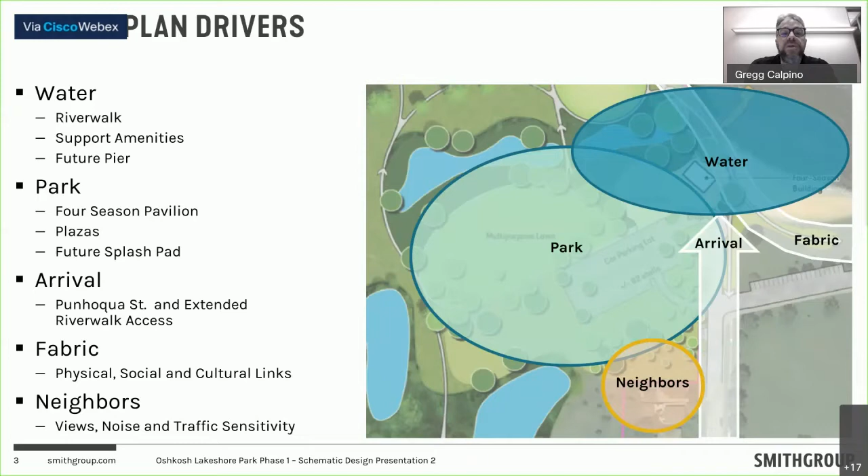So what does that actually mean for our site? From a water perspective, it's water plural—there's the junction of the lake and the river, how that's experienced, as well as the lagoon adjacent to us. These are all factors as we locate and design the building, thinking about views, what presence it will have on the Riverwalk, the experience from the building, and what to do with lagoons and pump houses that are nearby and not going anywhere.

From the park itself, there are long open views and fairways we can use to our advantage, while also making sure they remain great views in their own right—thinking about what role the building plays as well as having the right presence in the park.

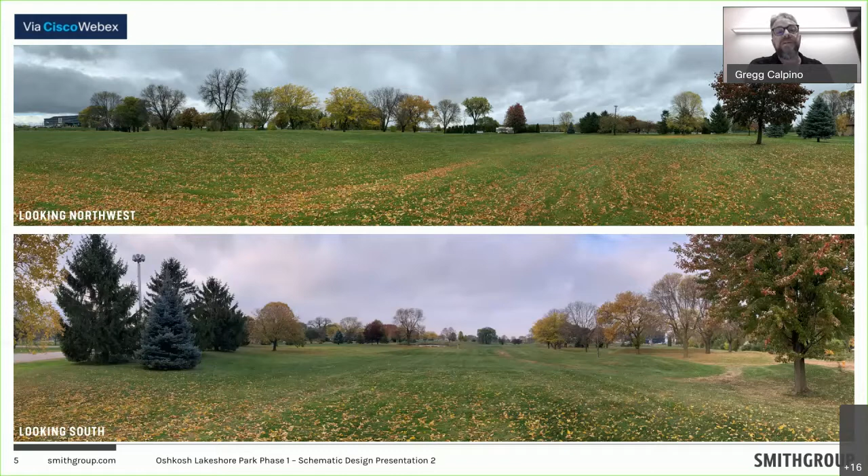Thinking about the arrival, there's a bit of drama as you come up Punhoqua—what's this new view going to be, how does this street end? It's evolved with the Riverwalk and some of the road that's been removed for it. How does it tie the two parks together? What's going to replace this building here? These are all things we're thinking about for the arrival experience.

Also thinking about being a good neighbor, both immediately to our south, but also, as someone brought up, the Oshkosh Corporation as a new neighbor—what does that mean in terms of their employees, but also the aesthetics, and how do we play off that from a design perspective. These are all factors we're looking at.

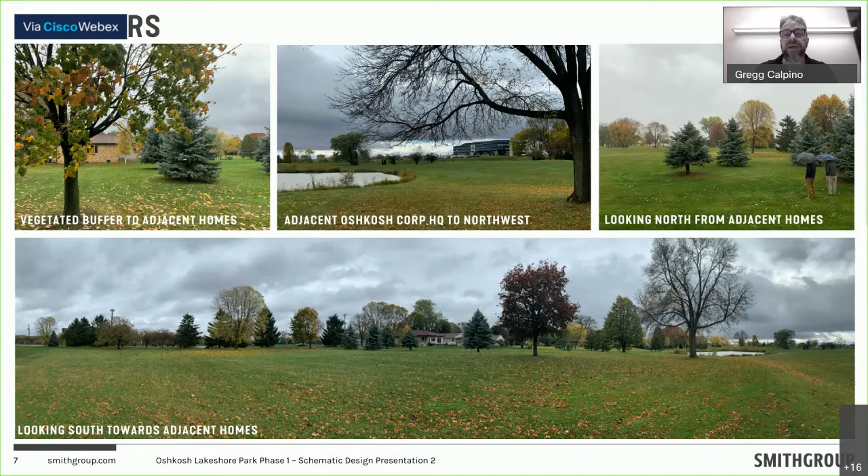One of the things we're looking at in our site analysis is the 100-year flood level, because of the proximity of the new four-season building to the water.

We've learned through a number of different materials shared with us that currently where the existing maintenance building is on the site, this will be the location where the new four-season building is sited. The current elevation of that building, that slab on grade, is actually 1 foot below the 100-year floodplain.

So one of the things we know we want to do is raise the new building up to a safe elevation. Right now we're looking at elevating it about 5 feet above the existing 100-year flood level. As part of the site analysis, we're also looking at subsurface conditions, where we have stable soil and where we have unstable soil, and what that means for the building's design in terms of the structure it's designed upon. This helps inform the building design in general.

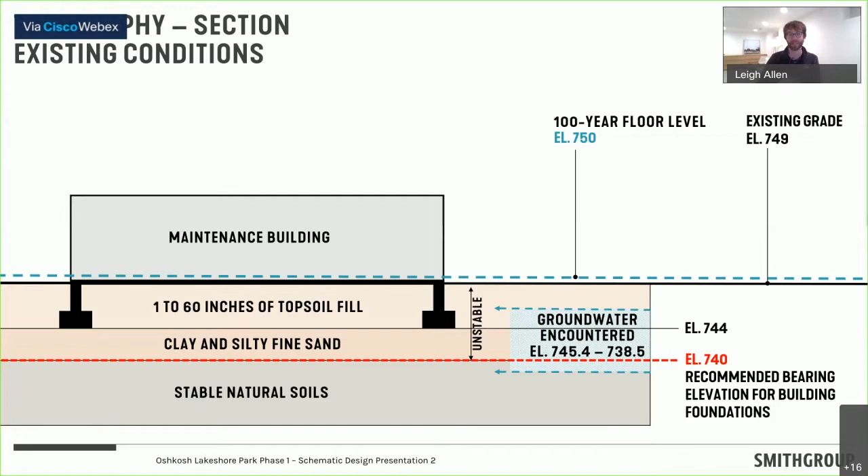So really turning that analysis into some of the design drivers. This is kind of turning the corner into what they become as guiding principles. These are really the things we use to define the design, but also evaluate whether we're achieving it. So again, those analyses of things I brought up—water becomes embrace the water.

And that's the lake, the river, the lagoon, as well as stormwater—again being a good neighbor from an ecology perspective. Serving the park, that's physically the blue arrows, that relationship with the water. Serving the park, thinking of the other side of this building, kind of the yin yang of the blue and the green, its role serving both parks. And again, thinking about that balance between the casual visitor and the program visitor that the four-seasons building will provide.

Thinking about celebrating that arrival experience—that's both Punhoqua and the Riverwalk, the future pier in the master plan—thinking about how you walk here, drive here, bike here, and making that a great experience for the user, as well as the statement that the building and the park make from that perspective.

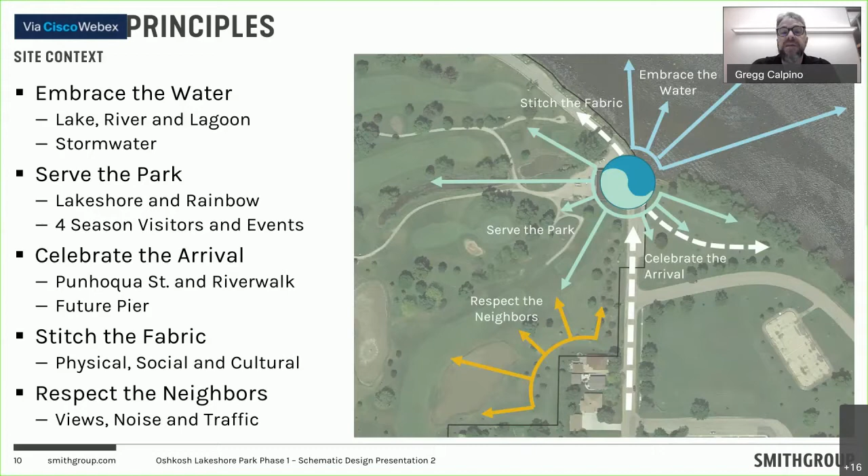Thinking of it in a way that really does stitch things together, both in terms of what's been built and what will be built in the future. And then being a good neighbor to our folks to the south as well, respecting views, noise, and traffic, things we've been trying to do through the validation but continue to do with our design refinements.

And then that really led to the next step into actually getting into design, and where we locate buildings and plazas. These were kind of three big drivers that we took from those five. So celebrating arrival talks about how this building interacts with Punhoqua in terms of its presence, as well as things like plazas—how do you get there?

What do you do? Do you wait for a ride? How do you get to the building from the road? Things like that. Engaging the water has a similar response in terms of views, things like a deck. And what's the indoor-outdoor experience there, as well as serving the park.

So really you start to get into the idea that there's a building with different plazas, views, and decks—things like that all start to have a little bit different role, different character, different program, but they all need to be stitched together as one design, which has really become our mission here.

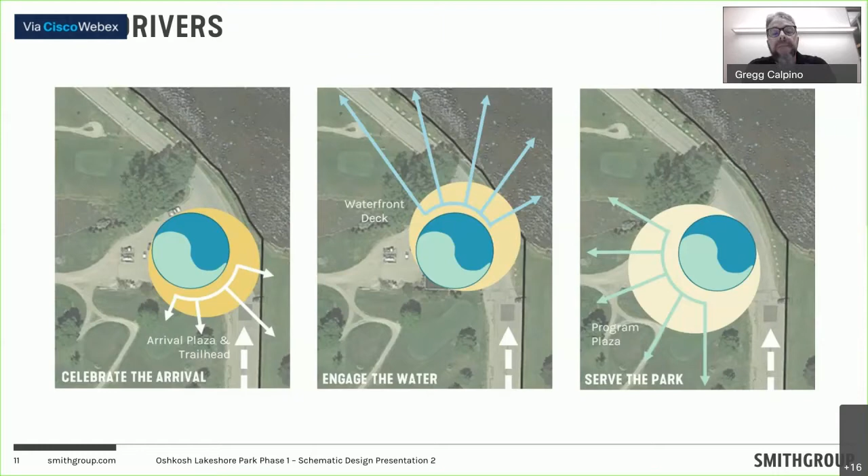So doing all of that, we had looked through a series of different alternatives of what the building could look like, the site, how that could all work. We settled on this general idea, which is, again, one step further from the last time we saw you.

The idea of a drop-off at the end of Punhoqua, with the parking lot roughly in the fairway alignment, with an egress or exit that would leave the parking lot, and then the idea of a building that was a very compact, simple floor plate with generous outdoor space around it, so the building could flow out, ebb and flow with the size of events or just everyday use. So the idea of decks and plazas around it as well. Also thinking about future things like the spray ground as well as the pier and how it interfaces with the Riverwalk. So this was the general arrangement of the site that we settled on to start getting into more detail.

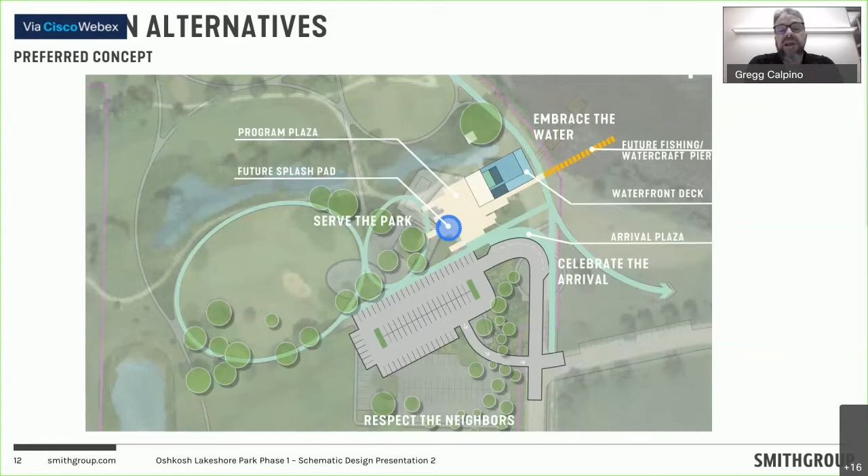Now, this is very conceptual, but a few different concepts were presented for a building parti that combined the main program elements of the Four Seasons building. There will be an open air deck that will wrap a portion of the building. There'll be an assembly room, building support space, which would include indoor access restrooms, a warming kitchen, mechanical room, and storage room.

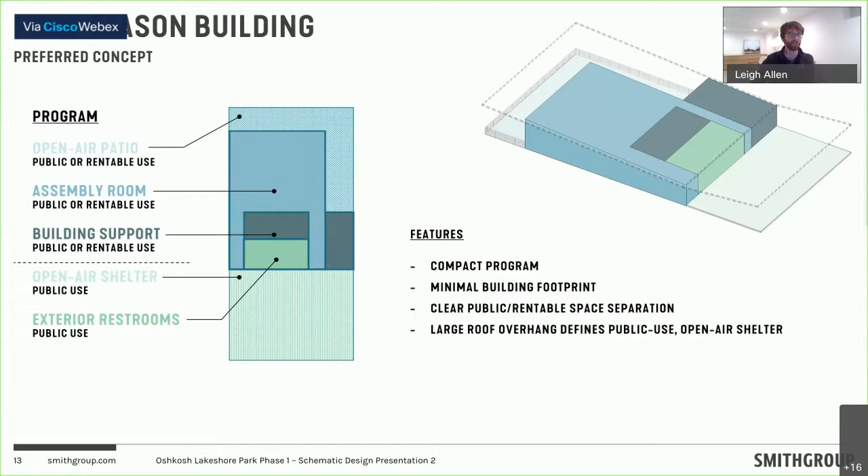As Gregg said, this is one of the few concepts that were presented previously. The preferred concept showed more of a compact program. It's really identified as an open use space, this kind of outdoor terrace area, sandwiched between a shared core, which again is these support spaces and the exterior access restrooms, the assembly room, and then the deck.

So in general, keep this concept in mind as we move forward: open use, public access outdoor space, shared core, and then what would be the rentable portion of the building, which would face towards the water, which you'll see in a few slides coming up.

Think of that rentable blob as sort of an overlay. The entire thing is really an open use facility, but the enclosed rentable piece is where you might have that additional ability to rent it. I'd say it's an overlay on an overall open use facility.

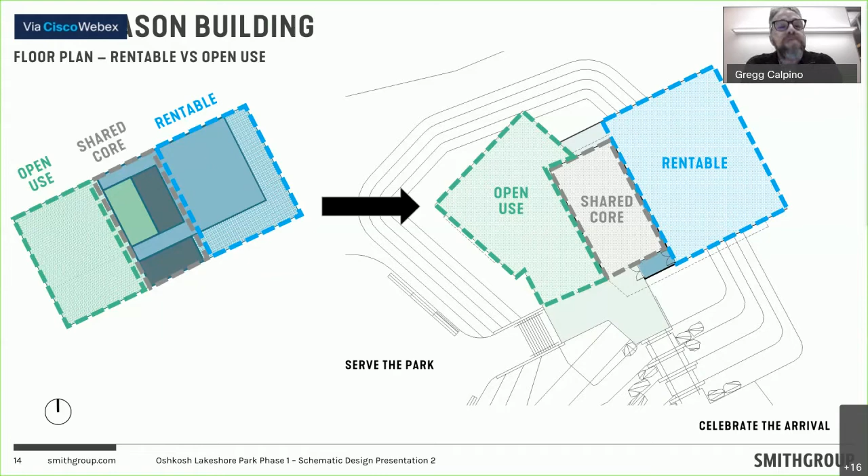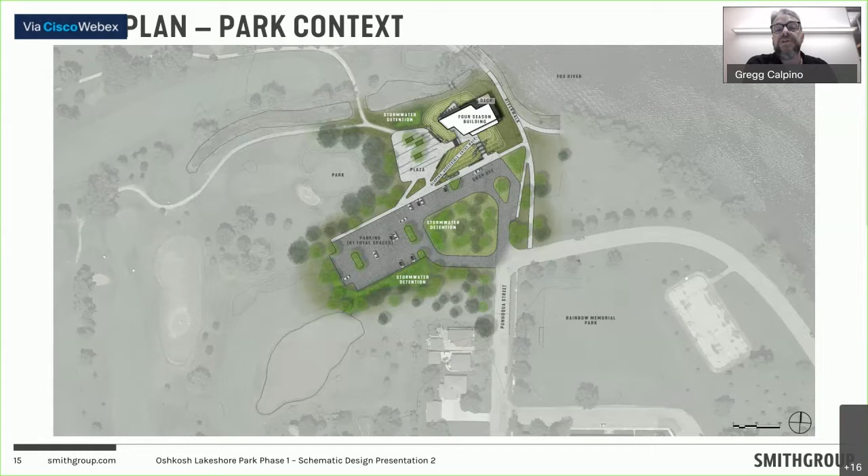Thinking about accessibility, thinking about different ways to get to the building, and thinking about additional pieces like the spray ground down the way. So maybe getting into more detail.

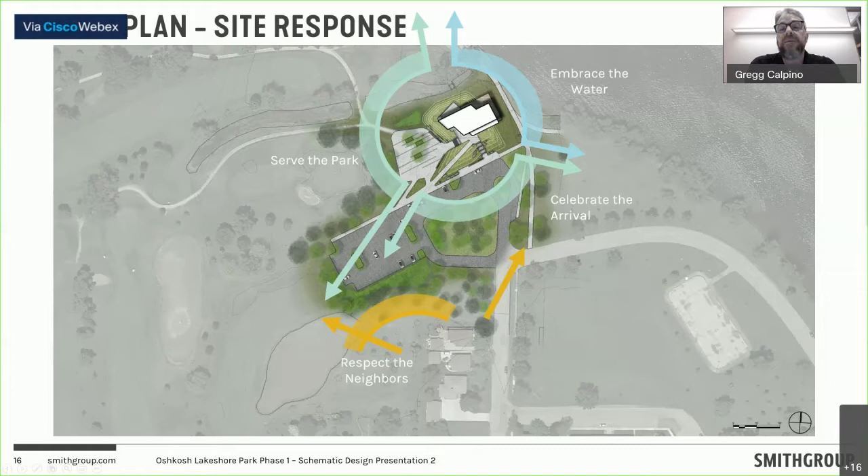The next slide goes back to those guiding principles, making sure we're always holding ourselves accountable to these: embracing the water, serving the park, celebrating that arrival, and being a good, respectful neighbor here.

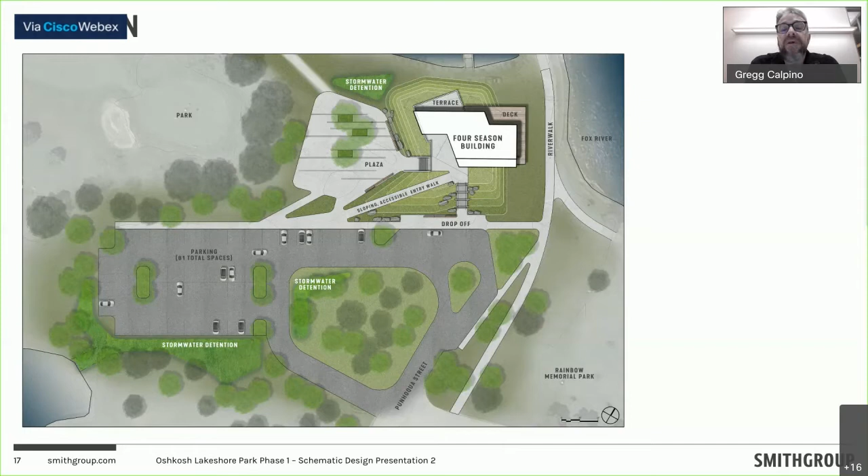Getting into a little greater level of detail, I'm going to go quickly through this to show you how it works. This is the overall site plan around the building. So driving up Punhoqua, there's a drop off that serves a couple of purposes, which I'll hit in the next slide. It is a true drop off, but it also provides some parking as well.

Thinking about fishermen who don't go into the building, they fish along here. So thinking about those uses, the drop off could double as providing a few more parking spaces for that, as well as for just wanting to drop off at either Lakeshore or Rainbow Park.

Generally, you start to see the flow of how cars would move through this lot, as well as generally where the parking spaces would be. There's a nice relationship of drop off to building, nice relationship of where some of the ADA spaces would be to the building, and ramps that get up to the door. Again, very clean, efficient parking.

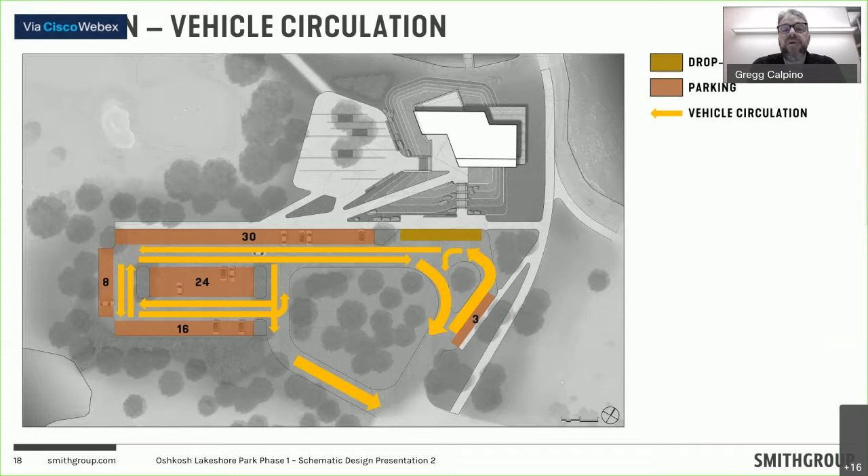And then you'll see in the next slide, this works very well also from a service perspective. This illustrates how fire trucks, ambulances, as well as things like trash pickup would also use the flow here. We did some early modeling of fire trucks, and this larger drop off or aisle that serves the parking lot works very well for fire access and turning those larger vehicles around, whereas for a typical regular vehicle, car, or SUV, the smaller drop off on Punhoqua would work just fine.

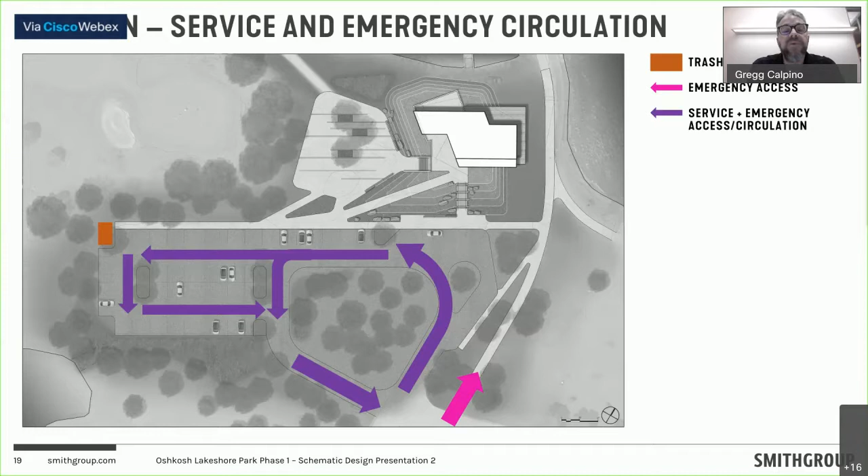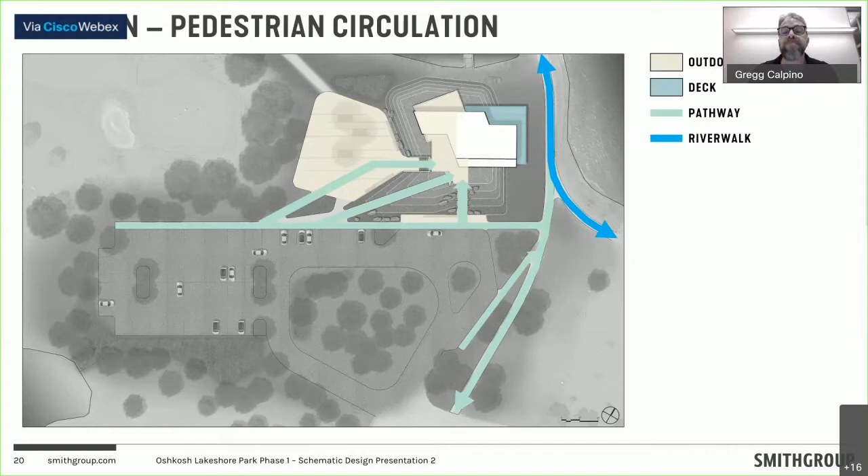Thinking about materials, we're still early in the process, but generally this is a park, and I think the master plan was very supportive of a more rustic, nature-inspired park. So the idea of using natural materials like stone blocks can be used for both hillside retaining and also for seating and other features. We want a lot of different ways to get in from an accessibility perspective, but we also might have some direct routes with stairs knit into the landscape.

Thinking about the decks and plazas being very flexible outdoor rooms that complement the building with open views. Leigh will get into the railings and things like that later, but again, it's a nice blend of natural and open waterfront materials that really celebrates the connectedness to nature.

Thinking about the plantings, we're considering the overall park and how this site will be the first piece of it, taking our cues from what would happen here naturally. Some of it already does. We're thinking about natural communities like oak savannas and prairies, both wet and dry. Some of the wetter areas are inspired from around the state as well as this area. We're starting to think about how these would overlay on the site, then come up with specific plant mixes representative of our planting design. Those details will show up in schematic design, and we'll get into much more detail in design development around species and size. But generally we're trying to take our cues from nature and give back a little, as this golf course transitions into a larger, more natural park.

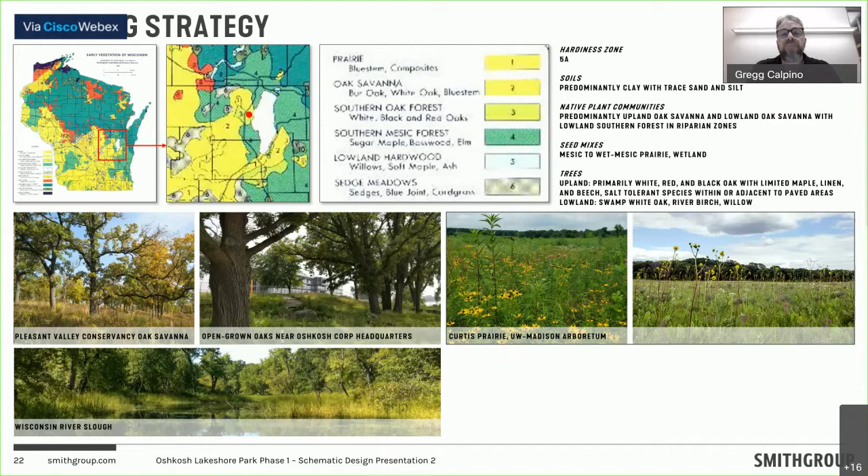This is an indication of how that would look on our site. Very little lawn — we're thinking of lawn as the transition into Rainbow Park and maybe along the trail. The majority would be more of a native seed mix, varying by how wet the area is, but generally a much more native seed landscape.

Where water is intentionally going, we're thinking of a bioswale mix that will take that water and have a bit of a different character — think of it like a wetter version of the prairie, with a slightly different species mix. Then where we want a more refined approach, that would be contained to areas around the ramps and the building, where there's higher foot traffic or more visibility, but it would still be representative of the broader native landscape across the site.

Speaking of drainage, we're starting to think conceptually about utilities and drainage — generally where we'll tie into feeds off the street for gas, water, and power. Leigh mentioned elevating the building 5 feet, so this starts to show where that footprint of the grading might be. With that comes the ability to get to the building at a very approachable slope, less than 5% to meet ADA, without railings, feeling like a natural approach while also celebrating a bit of the drama coming up to the building, thinking about where water is going to go.

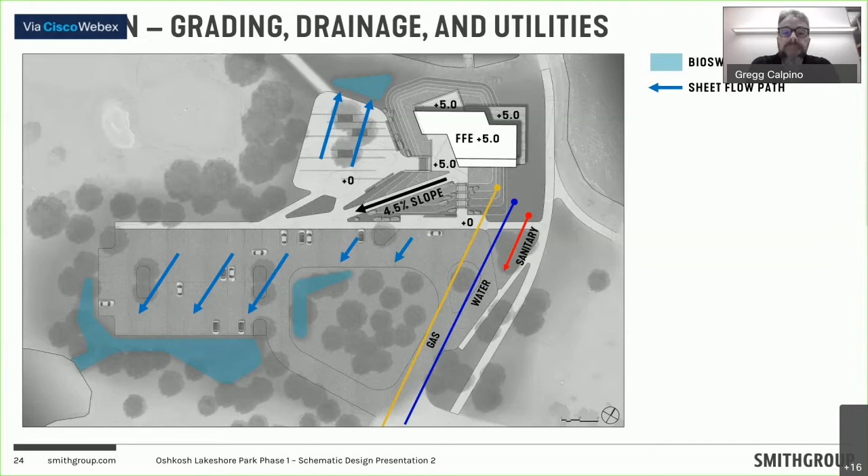And then when you put it all together, this is kind of what the site plan looks like. A little more detail, just zooming in on the building. You start to see where you might have some stairs, ramps, what's paved, what's natural. Leigh will get into more around the building, but we're illustrating where you would see pavement on grade, labeled terrace and plaza, and where you would have an elevated deck, labeled deck. Think about these as spill-out rooms from the building itself.

One thing we're starting to think about that's not in this phase, and there's still more detail needed, is we're working with Ray and his team in terms of what the spray ground will be down the line, what size it is, how it's going to work. That has implications for where service goes. But generally, we're thinking a quadrant of this plaza would be dedicated to that spray ground.

We are designing this - some of this effort is also part of our cost estimation scope. We're going to look at what all this costs, but right now we're thinking the plaza is likely going to be a future phase. We want to make sure we design it now - how big it's going to be, grade it, make sure we know what paths are going to connect to it - so it's an easy piece to plug in when funding is there for the spray ground. But if funding is there to build part of the plaza, we'll try to get as much as we can in at this point. So that's part of our effort here - there may be some pieces you see in schematic that may become future phases the next time we're in front of you. The plaza would be one of those.

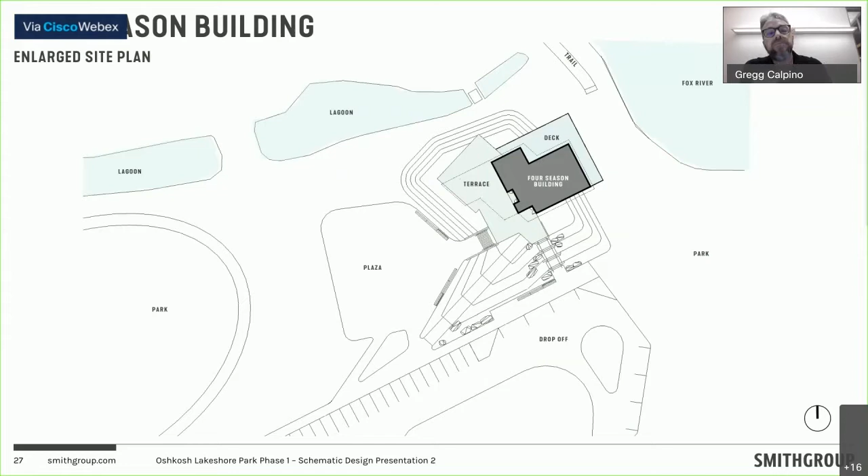All right, so zooming back out a little bit again, just to put everything back in context, you can see.

Hey, Leigh, can you maybe get a little closer to your mic? You seem a little quieter. Thanks, sure, sorry - is that better?

All right, so zooming out a little bit and showing again the context of the site and the site's relationship to the building, what we start to do is identify the primary gathering areas of the building - this outdoor terrace, the outdoor deck, and the indoor assembly room being those three primary gathering areas. We'll keep revisiting these areas throughout the remainder of the presentation.

Once we understand where those gathering areas are, we start to think about the views achieved from each one of those spaces. One of the things we think is important is to create this idea of an equal, democratic space. So if you remember the diagrams I shared before, where this blue area of the floor plan is that rentable space - the terrace was that open use space, and then you had your shared core area.

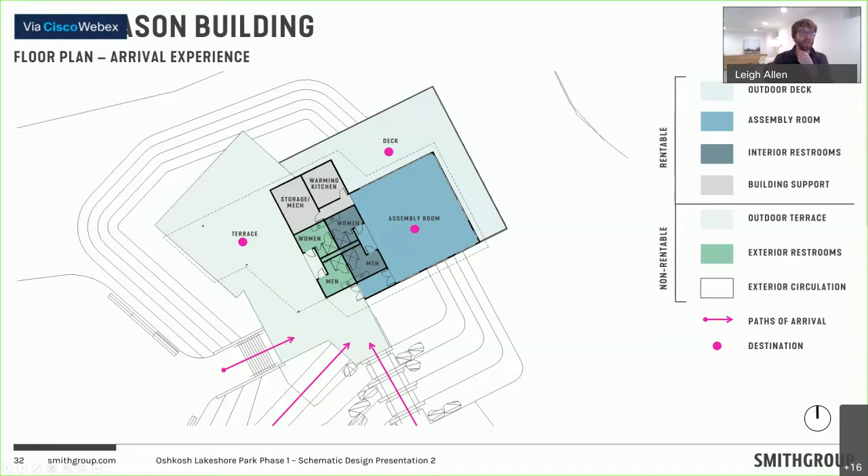So that's one factor of the wraparound deck, there's a bit of mystery that rewards you for that discovery, but there's also something very obvious about the decision point at the door. That's one of the big pros and cons there.

So what we're going to do in the next couple of slides is try to put you in each of these destination spaces. We've started to pull images of spaces that we feel this space could have a similar feel to, where you would look down upon the plaza, look north to the park, look north to the water. One consideration for this terrace design is potentially incorporating an outdoor fireplace that could be used in the cooler months, and perhaps there's an opportunity to put one here, and likewise on the other side, on the rentable portion of the program, perhaps there's an opportunity to place something in this corner here.

I'm sorry, when you say here, I don't know, I can't see what you're pointing at. Can you guys see my mouse? No, not really, or it's really fast. I'm sorry, it's not clear to me, maybe it's just me.

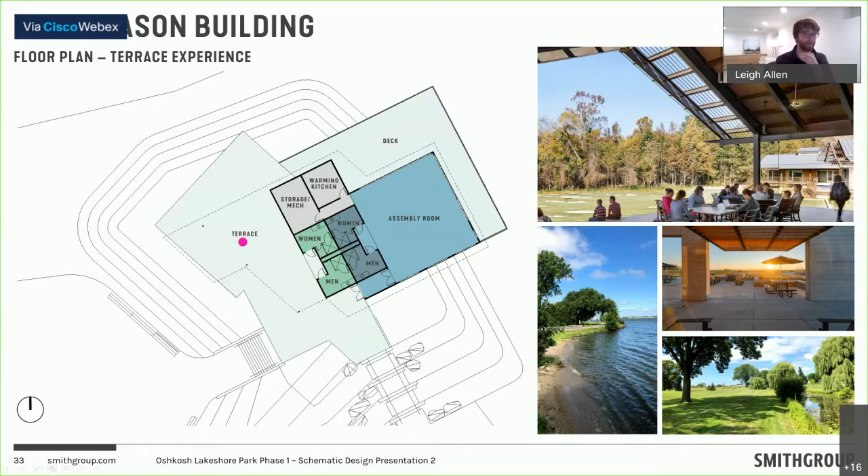Some of the primary views afforded from this assembly room include direct views of the water, and you're also going to have direct views of the park.

Then we're starting to look at ways of exploring flexibility of use between the assembly room and the deck attached to it, potentially looking at operable partitions, large glass openings that could be folded and fully open, so it starts to blur the line between what is inside and what's outside. That gives you an opportunity to flex between both indoor and outdoor spaces.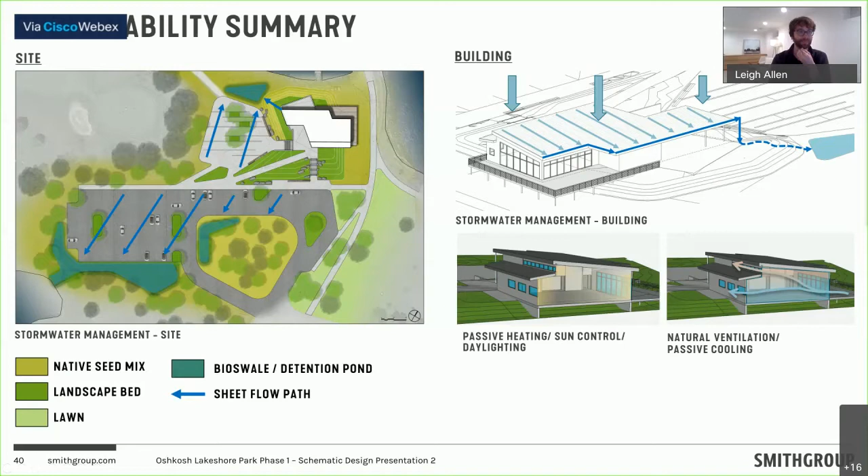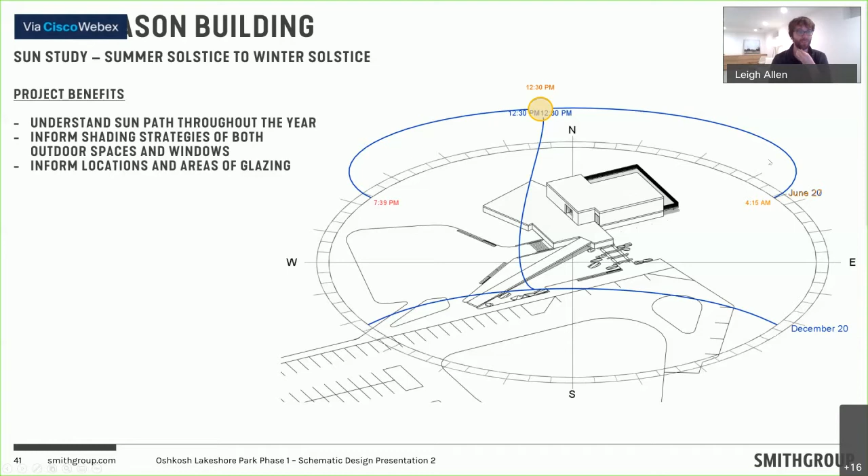The last couple of images were purposefully diagrammatic, design drivers helping to inform the project. Now we're coming back to our project site. For the next couple of slides, we're doing a sun study, just looking at a flat roof for the purposes of this study. It's really looking at the sun's path throughout the year, from summer solstice to winter solstice, factoring in the two equinoxes at the midpoints of these two paths. What we learn from this is where shade and shadow fall, which facades are in direct sun all year round, and how that informs shading strategies for outdoor spaces like the terrace and for windows along the facade.

That has the orange line on it. You start to see that during the winter solstice, the deck to the north of the building is in complete shade. During the equinoxes, it's in partial sun, and in the summer solstice, it's in almost complete direct sun—again, considering a flat roof for the purposes of this study.

You also start to see that the terrace is in direct sun, full sun, all year round. So what that starts to tell us is really you want to start considering perhaps some kind of shading option, potentially a roof overhang for that terrace, to give people who want to hang out there a little bit of reprieve from the direct sun during the summer months.

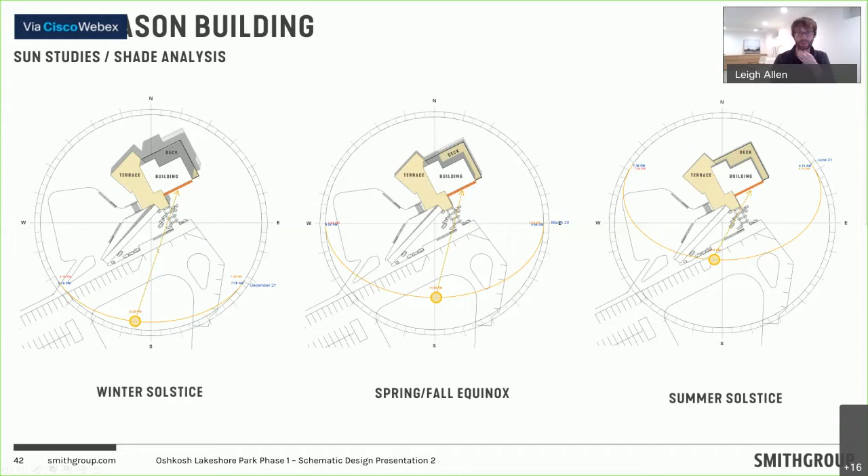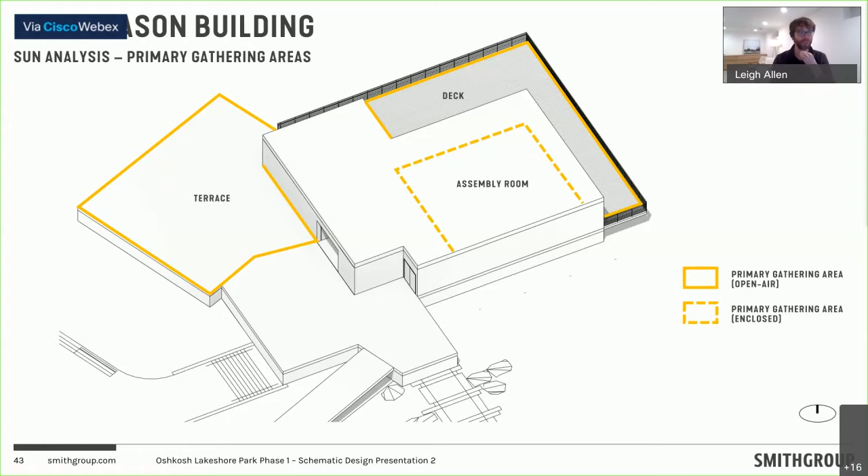Looking at the spaces that are either in partial sun or indirect sun, we would consider shading the deck optional, to be honest. Depending on when you're on that space, you may be in sun or in shade. In spring and fall, half of the deck would be in shade, half in sun, so you can easily flow between. You have an easy decision without having to add anything else in terms of a roof overhang, gazebo, or some kind of sun shading device.

And for the facades shown in blue here that are in indirect sun, we would say that adding shading devices or designing the roof overhangs to provide shade in the summer would be optional as well.

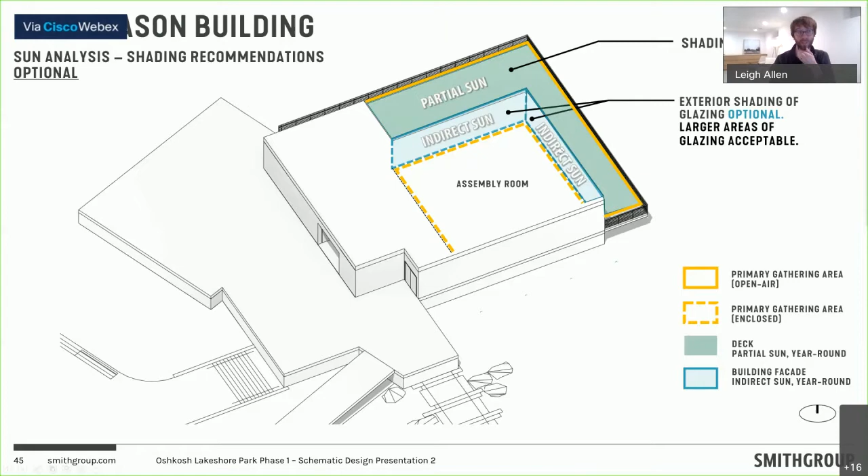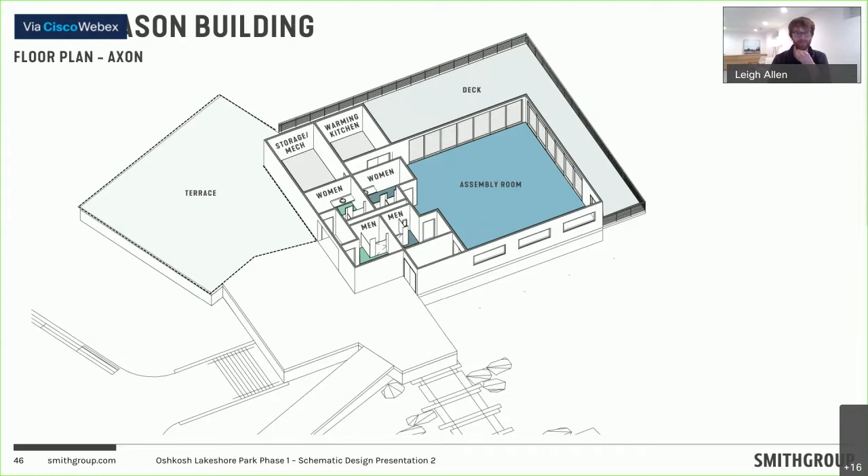This is just one concept, taking everything I just mentioned in terms of passive design strategies, as well as the sun paths, into account, and how all of that together informs what this building wants to be - where we have glazing, what size that glazing is, is it directly off the assembly room, do we have clerestory windows, where are roof overhangs, where are our outdoor sheltered spaces - looking at these outdoor sheltered spaces as the outdoor room, as Greg had mentioned before.

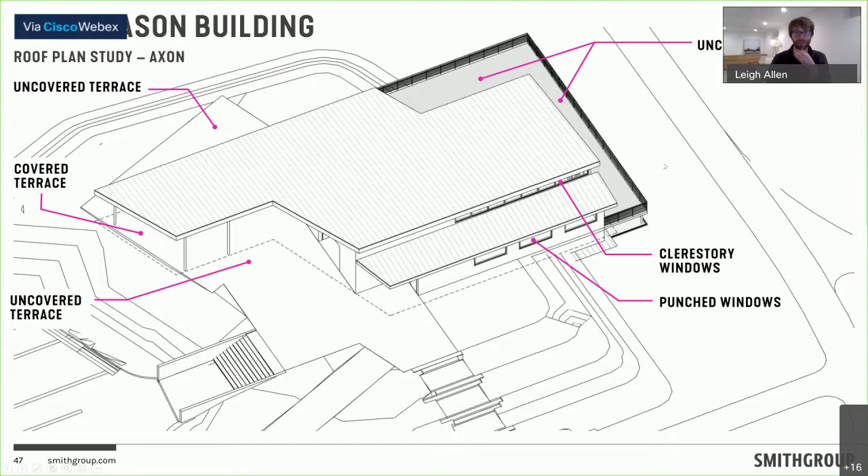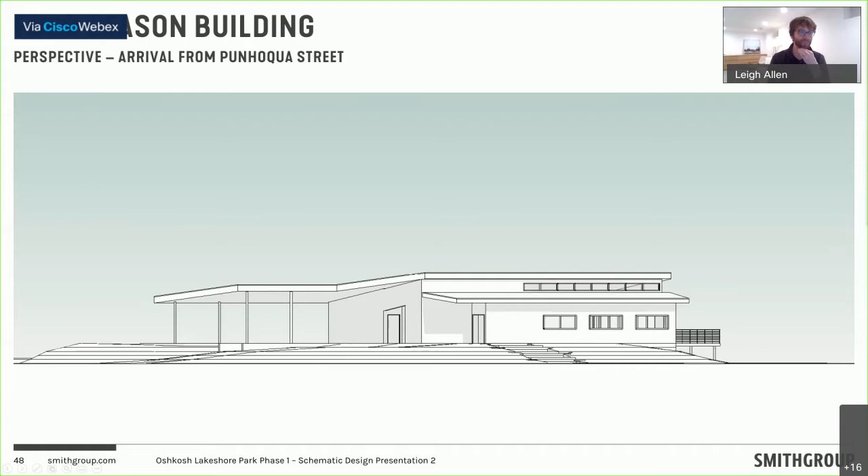And then this would be the view if you park your car - you can see the ramp, the two vertical lines directly in front of you, leading up to the upper terrace. You can see the staircase on the left, accessed directly from the plaza. You've got your outdoor access restrooms, your primary point of access to the deck shown on the left, and your primary point of access to the assembly room shown in the double doors to the right.

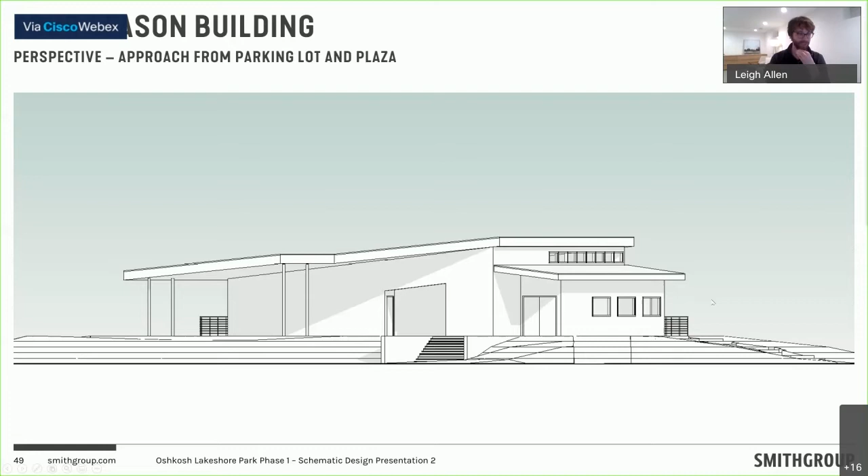And then looking at a view, what the view could look like if you're on the trail. So how do we sculpt the landscape here so that the building almost looks like it's propped up, and then you've got kind of a light touch directly around the building of this deck that are on a series of small columns.

And the railing—it's a poor choice for this rendering—but this railing would be much more transparent than is currently shown.

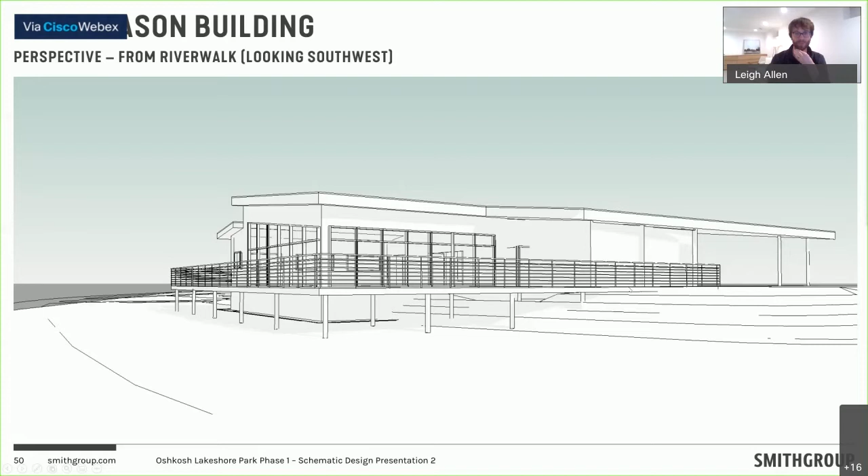Then starting to think about materiality for the building in general. What's shown here is we'd be looking to incorporate something very similar to this kind of combination, this material palette of wood siding, whether it's concrete, whether it's stone, and then your primary structural elements being steel is the thought right now.

The thought here is to build on the site materiality, so looking at natural materials—how do we incorporate concrete, stone, wood into the material palette—and then tie it all together with that kind of series of having steel being your primary structure for the building.

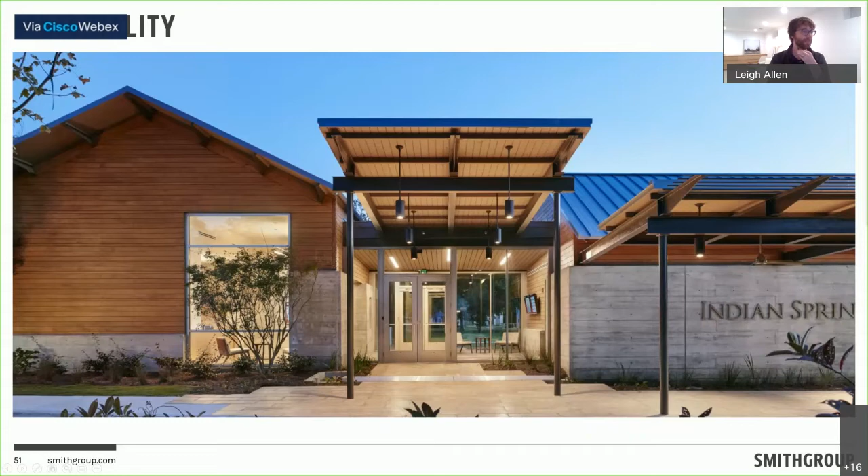And then with that, I think that brings us to our last slide. This shows again where we're at in terms of our current building floor plan, as well as our current thoughts on site design, and how both site and building integrate with one another, hopefully relatively seamlessly. So with that, we'll conclude our presentation.

And Ray, I don't know if we'll hand it back over to you or if we'll open it up for comment. I'll let you handle that. Yeah, I think Amy, if you'd agree, we'll open it up to some initial comments and thoughts from anything that the board has. Any questions?

Again, this is a lot of good background, I think, from Leigh and Gregg as to why they're looking to position the building in a certain way, to have the deck in a certain area and so forth. So you let me know how you want to proceed. Yes, I think questions, comments from the board would be good at this time.

Lori Palmieri: Thanks for that presentation. I think I came in a little bit after you started. Just kind of wanting to understand—maybe you already said this—with the natural cooling, would this have no need for air conditioning, correct?

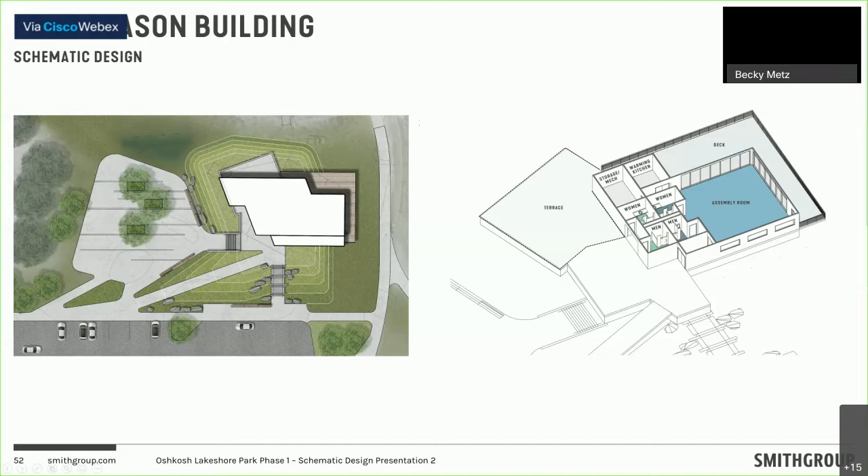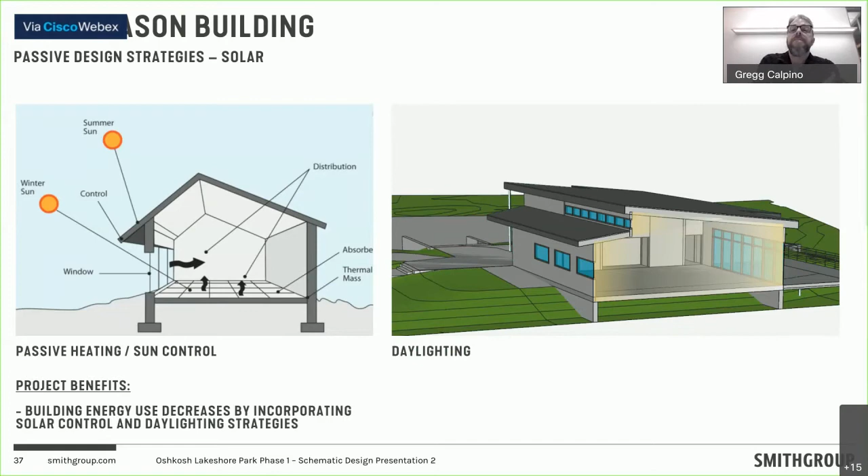This is Becky Metz. So what are the negatives with the deck wrapping around all of the other sides? Let me go back. Because it seems, since those windows are so small on that side, it seems like a deck would be good. So one of the considerations of having the deck wrap around.

So the thinking right now is that the deck not surrounded by the heavy dashed line—that portion of the deck would, if the assembly room was rented, the deck to the north would also be rented. The deck shown to the south, the idea is that would be, in general, kind of open use and would not necessarily be reserved for anybody renting the assembly room.

So one consideration, I guess one potentially negative thing to consider: if you have a deck on that side, and you saw the renderings of having windows along that southeast facade, if that portion of the deck is open use and somebody is renting that assembly room—let's say for a wedding, for the purposes of conversation—you're going to have the general public traversing back and forth. Depending on how many people are in the park that day and how popular the park is, you have the potential for people to walk back and forth and see into the assembly room, and therefore it limits the amount of privacy that you have into that room.

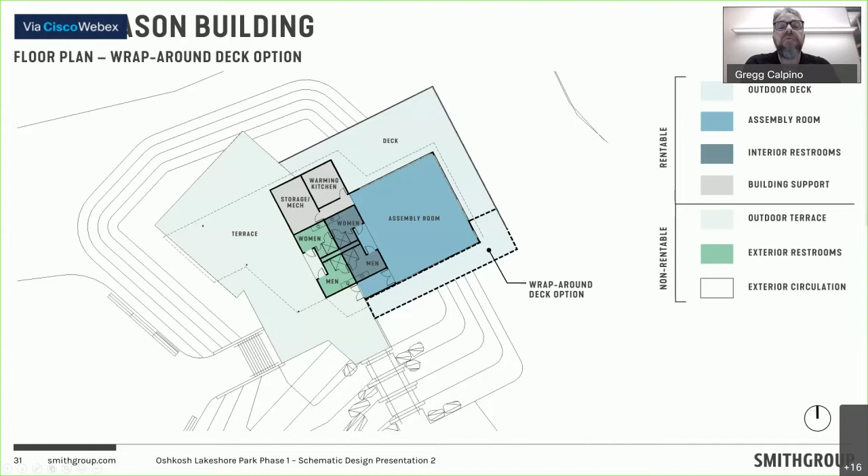There's also, as Leigh pointed out, something really nice about that discovery process of finding the way to the deck, going to that point where you're overlooking the lagoon and the park and then going further to the deck. So the pro of having that obvious connection is there, but the negative is it's almost too obvious and right in your face.

So there's something kind of nice about the deck being in the park versus on the road. It's really a nicer view, the angle that it's drawn in the base, where the deck facing the road isn't quite the same—it's in open sun, it just has a different character. That's why we're weighing both right now, there's almost equal pros and cons to it. That makes sense. Yep.

This is Deb Martin. I have questions related to the kitchen and the bathrooms. The kitchen does not look like a very good location for anyone serving. There's no serving from the kitchen—everything has to be carried in and out of that kitchen. So from a person who's served a lot of different events, that doesn't seem very helpful.

What is the size of those bathrooms? How many stalls? Is it a one-at-a-time bathroom? No, there's two fixtures for each restroom—two water closets. So for the women, there are two water closets, one ADA, one standard. And for the men, there's an ADA water closet and a urinal in both the indoor and outdoor restrooms.

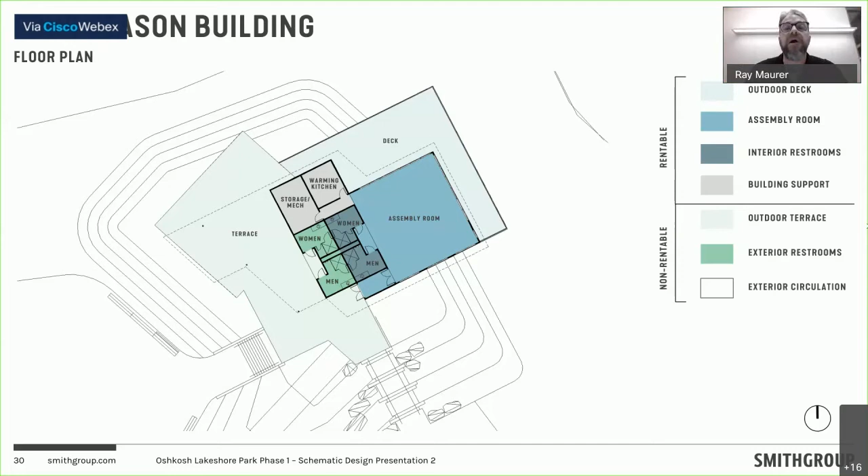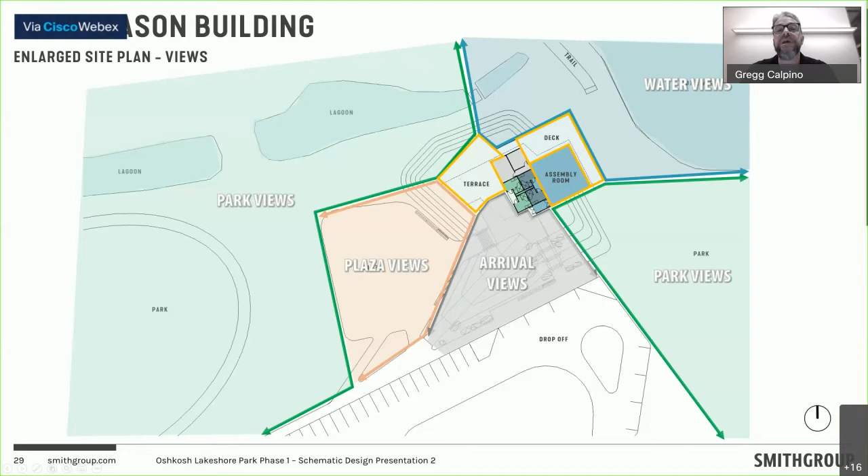It's serving the building as well as providing some park service to the Ball Diamonds Trail and things like that. The building is easier to calculate. The park is a little harder sometimes, but we're trying to find a balance where it's not too many, but it's doing double and triple duty here.

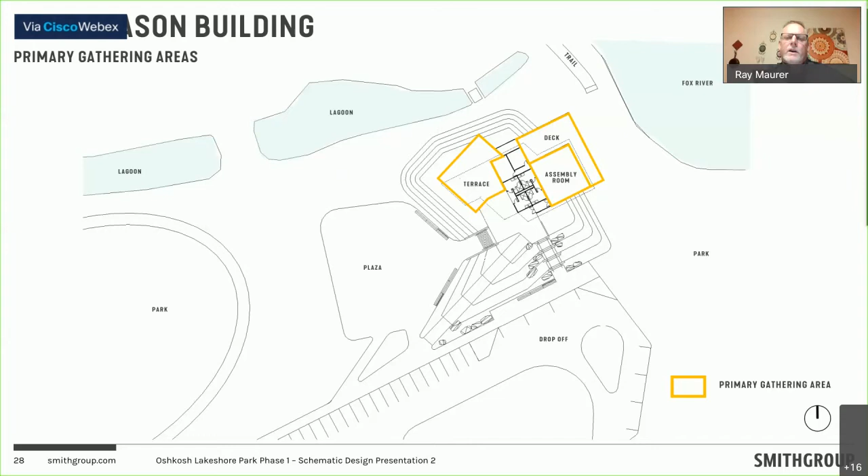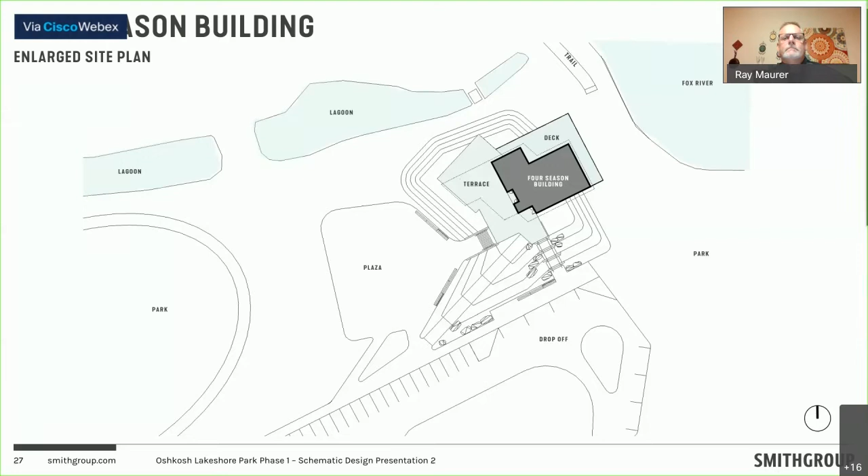Lee, can you speak to the assembly room capacity limit we're at currently with the design? Because I know it's gone down a little bit considering what we have to work with. Yep, we're now at what equates to about 1,500 square feet of space for the assembly room.

I could see, and we'll work with planning a little more on it, but let's just say it was 2 per car coming to an event here, maybe 50 of those cars or more for the building and 25 to 30 are for the site, but that could ebb and flow depending on the event. It's a good rule of thumb just to see that it's a reasonable parking size for the program here.

It feels about right, but it's also something we'll be looking more closely at, talking to the city with different codes and also looking at budget as well. We wanted to at least achieve the same program from the master plan we were trying to achieve.

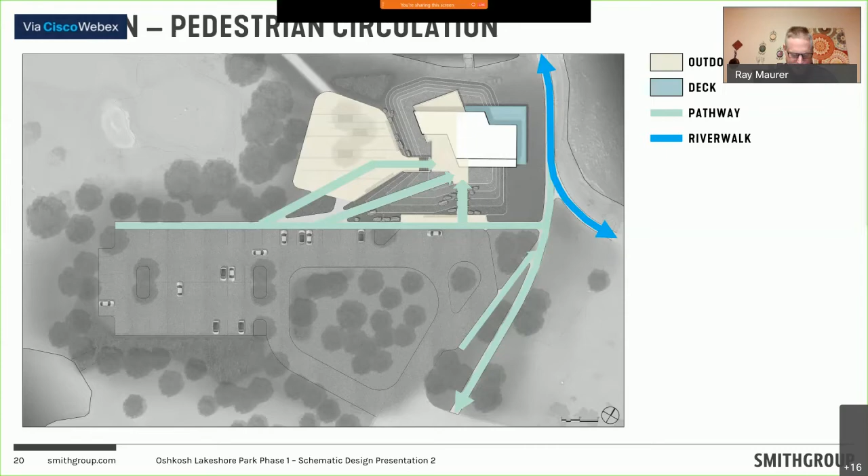Oh, I'm sorry, this is Deb Martin again. Another question, the rental space, is there a chance, Ray, that there will be times where it'll be a community event in that space, not being rented, but something the city is putting on? Oh yeah, definitely. I would see some of our programs being in there, some smaller type events that we put on, and some that the community might want to put on there. So yes, definitely.

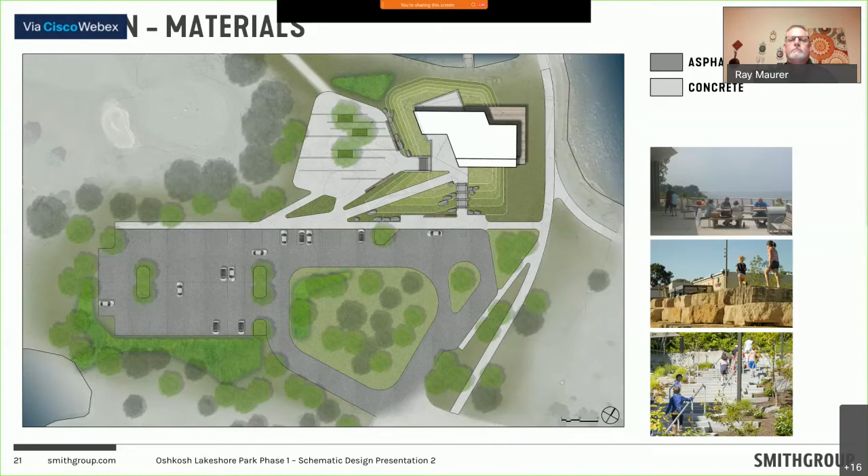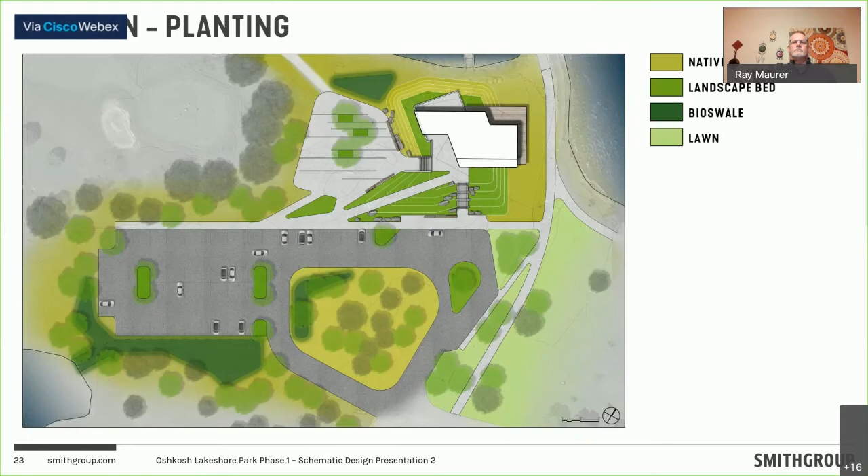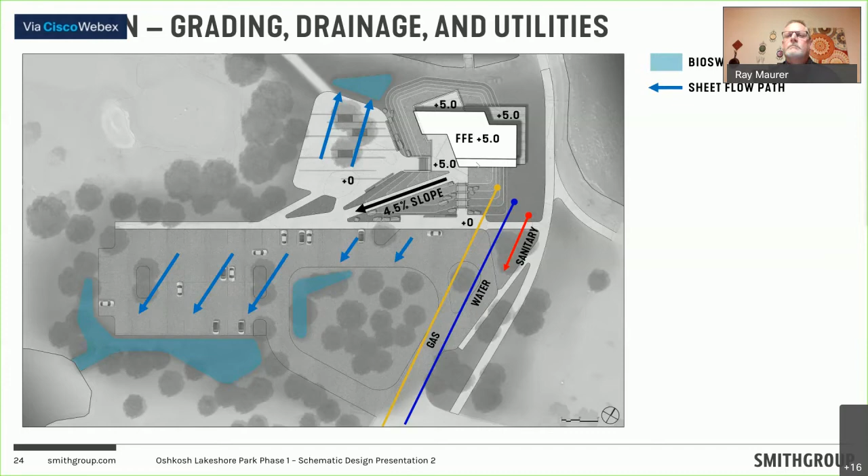There's a delay on my end. Apologize. Can you guys see the site plan enlargement slide right now?

Yeah, okay. So because we know that we want to provide shade to the windows on this southeast side of the building, it would probably make the most sense to completely cover that portion of the deck that would wrap around that side with that roof overhang.

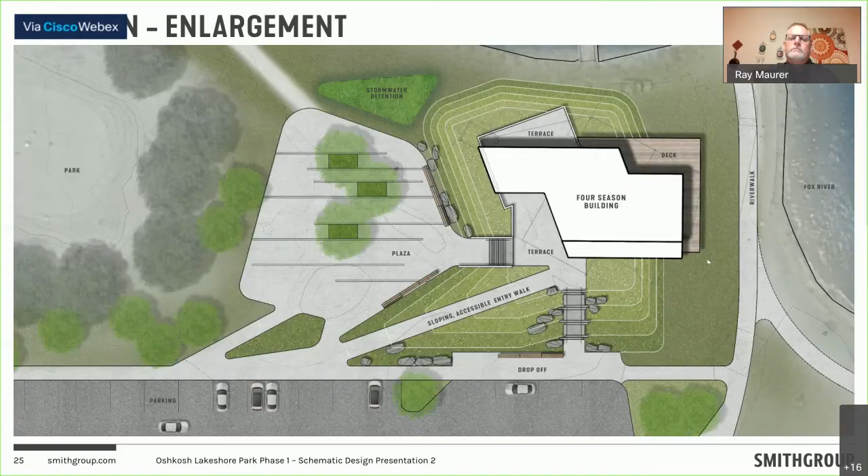Just so you wouldn't have basically... We may have lost Lee.

You also though would have a lower sun angle too, so it might be a little sunnier, even if it had the canopy over it. Probably the sunniest of the decks, let's put it that way, because of the orientation and the sun angle in the winter.

Okay, thank you. Lee just popped back in and I had to give him the presenter screen again. So I think if we give him about 30 seconds maybe, but...

Any other questions from board members or any clarification, any direction that you want to provide? This is Lori Palmieri. I just want to say that I love what I've heard so far.

One of the questions I had was going back to the discussion about the outdoor fire pit, which I think is an extremely cool feature. But Ray, I'm also wondering - there's a large outdoor fire pit at the Culver Family Welcome Center on campus, and I'm just wondering would there be any value to checking in with them about how much it gets used?